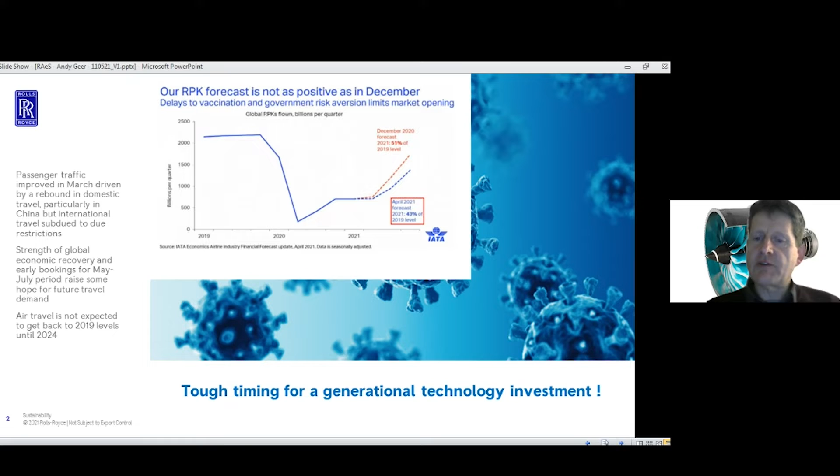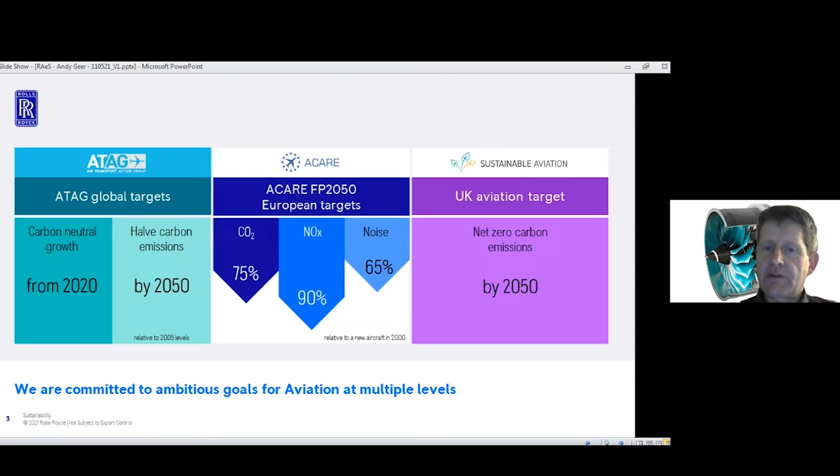On the larger and most particularly long range end of the market, classic gas turbines, but potentially modified in some way, either with an electric configuration to support them, or at the very least, combusting sustainable aviation fuel. That is, fuels that are produced in a net zero carbon, closed carbon cycle way.

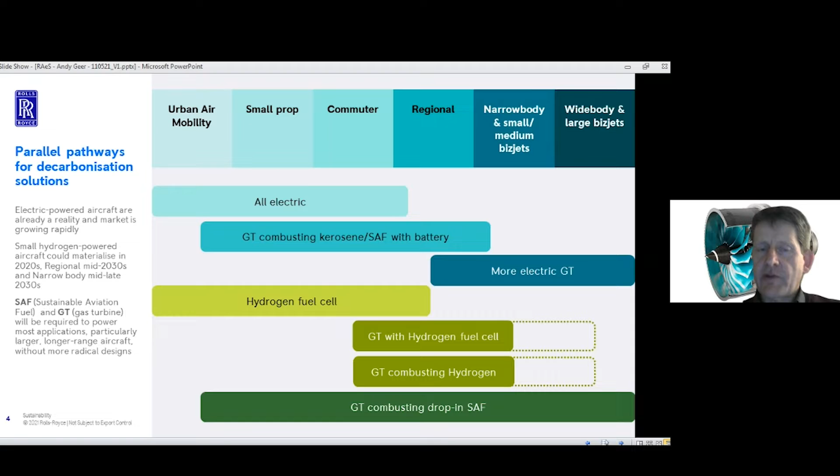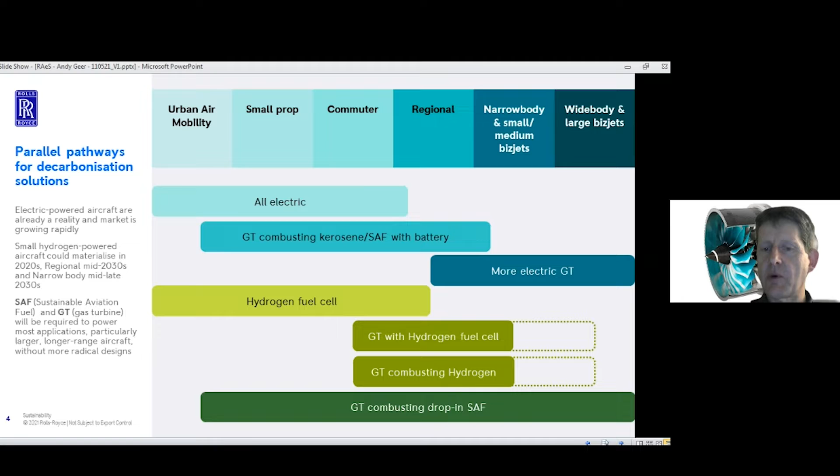It's a brave vision, and of course it's challenging to see a situation where we have to develop potentially multiple technologies to deal with fragmentation of the way aviation is constructed, from short range, small aircraft to long range, large aircraft. Rolls-Royce, of course, as a supplier of power and particularly in aviation propulsion, wants to be engaged in all these areas. And as a leader in technology, we're striving to bring technologies to market that can address as much of this sector as possible.

We have to cooperate in some ways at aircraft level, at engine level, and indeed in provision of fuel and fuel logistics. So really interesting times that we're living in, where you see these usually competing companies coming together to collaborate and move the industry to a new place.

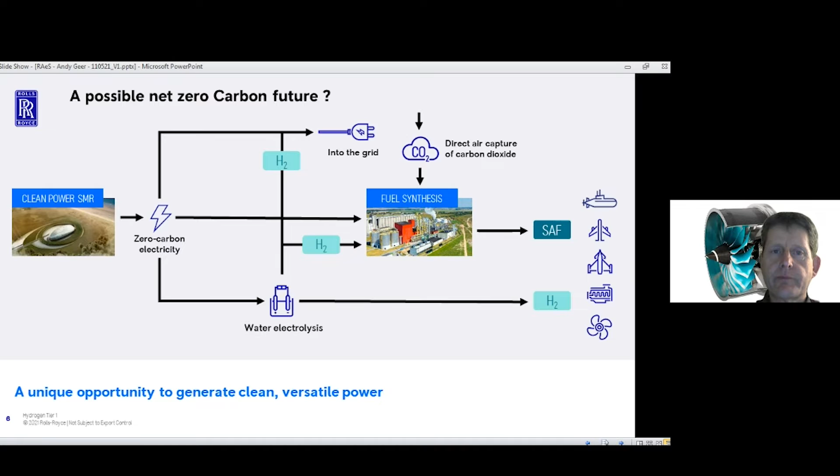Perhaps equally important, our job actually very often is to integrate other people's technology with our own to get from a propulsion system or an element of a propulsion system to a fully integrated platform solution. So 3 key areas of focus: evolving the gas turbine, developing radical alternatives, and integrating to platform level, all at the same time as motivating the wider industry to develop availability of zero carbon or net zero carbon fuel stocks.

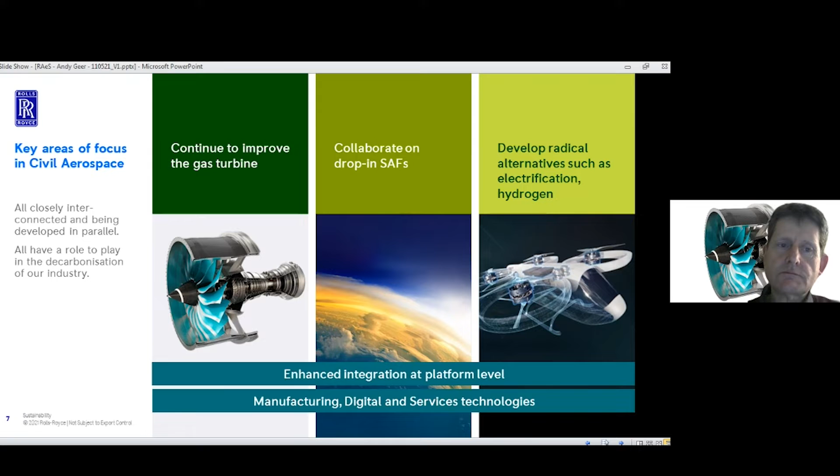So a quick aside, electrification. In Rolls-Royce's history, Rolls-Royce started out as an electrical motor machine, but it's a long time since we were engaged in that business. Nonetheless, we recognise electrification in aerospace is going to change major parts of society, major parts of industry. We're seeing that happen now. Lots of new startup companies active in electrical propulsion, active in air mobility in particular, flying taxi. But also active in providing parts of propulsion systems, parts of electrical control systems.

And as I mentioned already, you can see in society, if we're going to move to a very much more electrical set of solutions, there's going to be a whole level of infrastructure investment required to achieve that. I've no doubt you'll talk amongst yourselves about that in the automotive space. It's equally true and probably a level of challenge higher in aviation space.

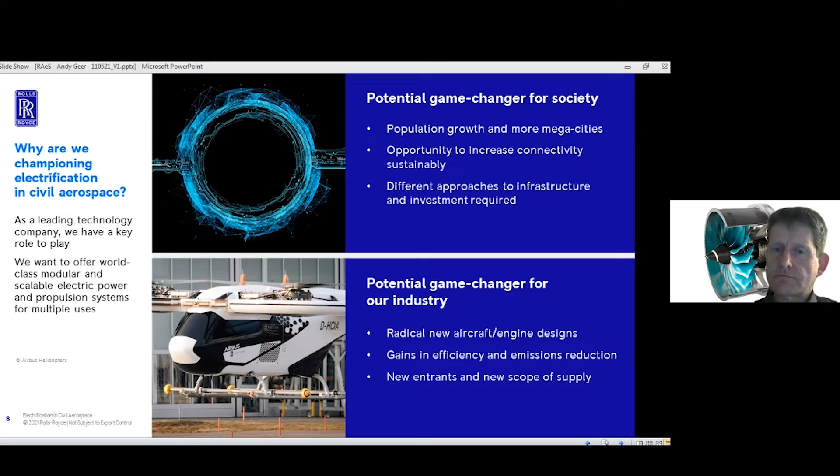There are many pictures and many ideas, so it's a very fast changing area. However, when you look at it from our perspective, it's underpinned by investment in technology, both in electrical machines and the gas turbines that might produce the raw power.

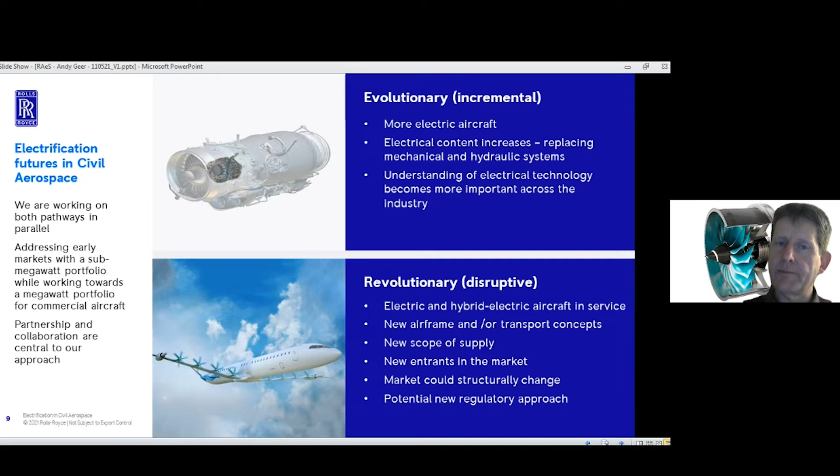A little bit different now, something you're going to see in the press before long. As interested aviation watchers, you may already be well aware, Rolls-Royce is doing some work on a project called Accel, pictured here. So a small, all-electric, single-seat aircraft designed to push the airspeed record, push the airspeed of all-electric flight, I should say. Really exciting project for the company to work on.

Now, it's a bit of a headline grabber, but why is Rolls-Royce doing this? Why is it spending money in tough times on a racing machine? Well, the answer is learning by doing. The answer is there's no better way to find out how to deliver electric propulsion than trying it. And that's what's happening through this process.

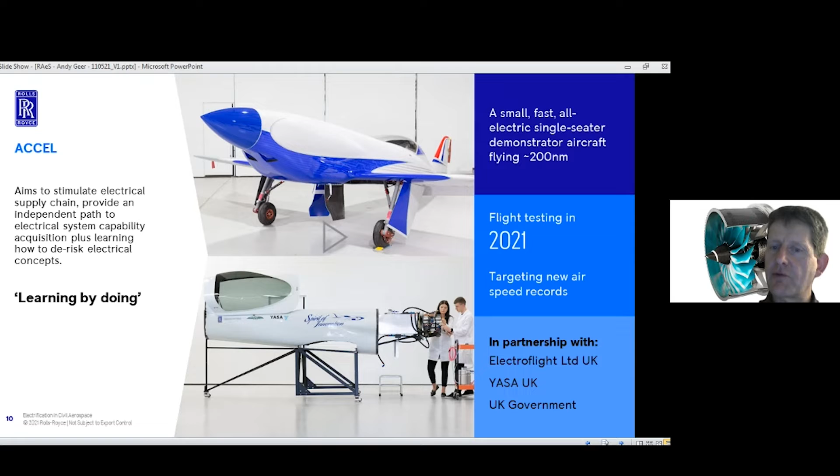So in actual fact, if I skip to the next picture, there you can see a photograph of the aeroplane outside the hangar, just about to undergo some ground runs just a few days ago. So electric propulsion in one form or another is coming. Quite what market develops behind it, we don't know. Rolls-Royce is absolutely engaged in the technology journey to be a part of that new market.

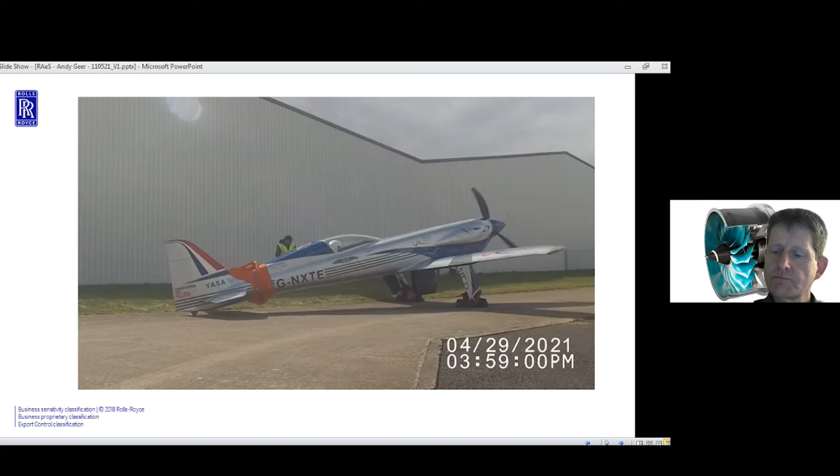Just one picture at the other end of the market sector. So that racing machine is about a 400 kilowatt animal. This is a 2.5 megawatt animal. So something that might look like a hybrid electric system, gas turbine close coupled to a megawatt class electric generator for something that could support that kind of revolutionary distributed power aviation solution.

You can see the tagline for Rolls-Royce, Pioneers of Power. This is a really interesting example of my 3 pillars picture. A highly efficient gas turbine, closely connected to a highly efficient electrical machine for use in a hybrid system.

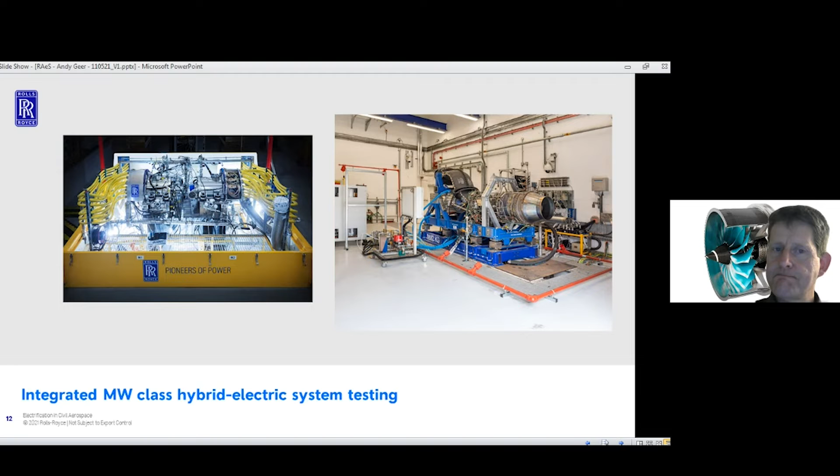The eagle-eyed will have spotted in my context chart, talk about hydrogen. A lot of discussion ongoing about hydrogen as a means to produce zero carbon aviation. And I've just summarised here a few of the factors that would attract you to using hydrogen as a fuel, perhaps. It's clean, it only produces water as an emissions product. You can derive it from a number of different sources, and of course it's an effective and fairly power dense fuel supply. So on the face of it, lots of interest in hydrogen as an alternate power supply.

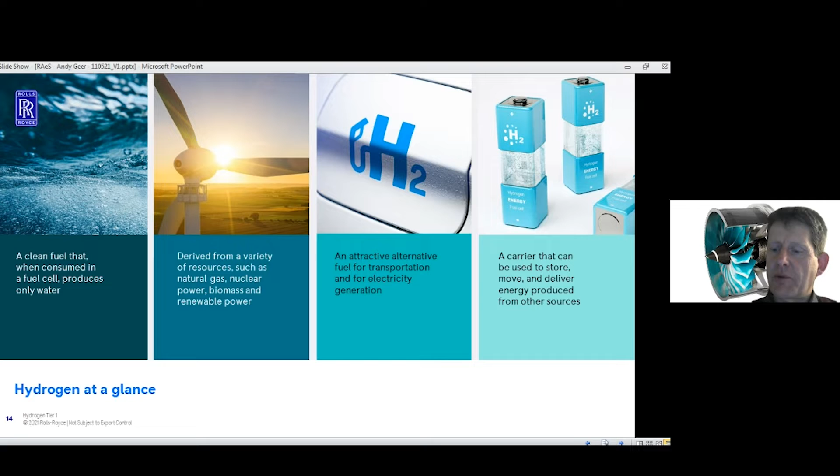But in aviation, there's some real challenges here. Burning the fuel is probably relatively low down the list of challenges compared to some of the other things that we need to understand and deal with if we're going to move into this kind of space. So 4 aspects of flying hydrogen which need to be grappled with. A lot of discussion about contrails and whether contrails contribute significantly to environmental damage or not. So hydrogen is a clean fuel, but it produces more water vapour. So water vapour at altitude would mean contrails, and we need to understand what that means.

Plus, of course, as you can see from the other pictures, there are some quite considerable logistic challenges associated with the use of hydrogen as an aviation fuel. Power density to volume, storage requirements, temperature requirements. So I really put that on the table to show that there are other challenges around us right now to deal with.

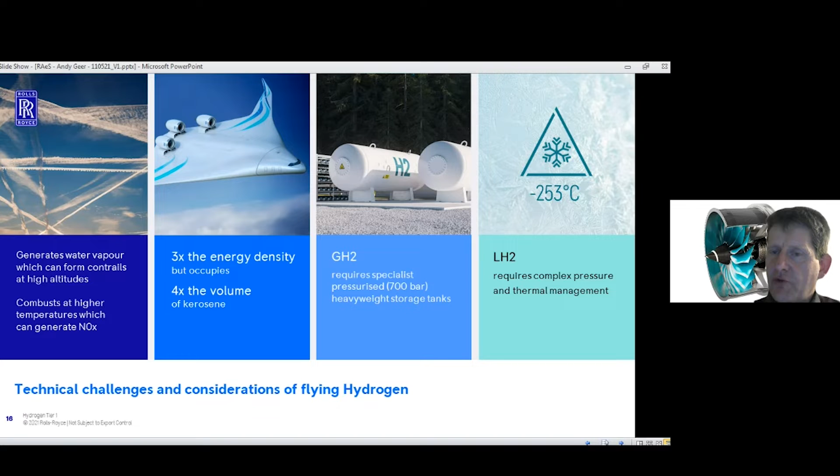How might those come together? And if I emphasise again Rolls-Royce's ability to integrate, here's a situation where we might see hydrogen being integrated with world-class gas turbine technology to produce one of a number of aviation architectures. Fuel cell to power, direct, no gas turbine involved, or more likely, hybrid systems where a gas turbine combusts hydrogen or acts in a boost mode, combusting hydrogen alongside fuel cell technology.

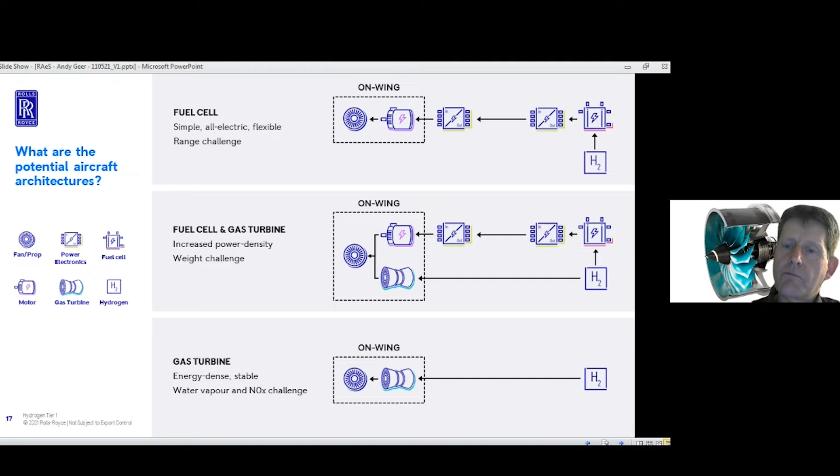Now that's quite a bit of context behind why Rolls-Royce is working on 3 pillars of technology investment: electrification, hydrogen power, gas turbines. I'm a gas turbine guy, right? My job is to deliver a gas turbine. And I'm pleased to say, in a narrow context, a great many of the solutions I've just shown you in context still rely fundamentally on a gas turbine producing raw power, even if that power is consumed in a slightly different way, into a hybrid cycle or a more electric cycle.

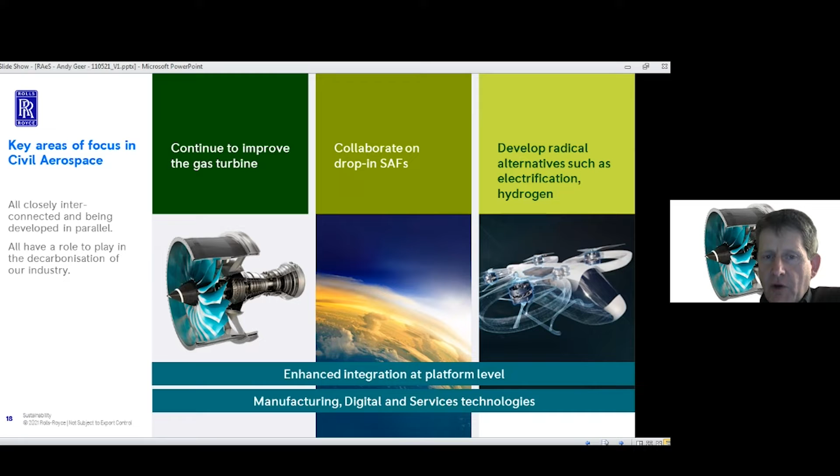So the challenge ahead of me and my team is very clear. It's to produce an UltraFan, a vision and a technically integrated solution of the next generation of gas turbines. What they burn, how they burn it, and how they provide the power, we can be flexible on that, but you fundamentally need a good, capable gas turbine to start the race. So without more ado, let me talk about what the UltraFan is as that next generation gas turbine.

Here's an artist's impression, or a general arrangement, if you like, a picture of an UltraFan. And badged on it are some of the technologies that have to come together in order to make an UltraFan engine work and to be super efficient. You can read the words for yourselves, but I'll highlight some of them. Those in green boxes, that is a low-speed carbon titanium fan system, power gearbox, an Advance3 or revised work split core, and a high-speed multi-stage IP turbine system.

Those 4 pieces of technology become absolutely essential to produce an UltraFan. Take away any one of those and you don't have an UltraFan machine. So those 4 pieces of technology are the prime delivery from the UltraFan Demonstrator program, making sure we can bring all those things together, integrate them, and have a super efficient engine as a result.

Things in grey then are either enabling technologies, so they're things we would like to do alongside those essentials, or they're things that bring a better attribute to the engine. So for example, if I could focus there on hybrid ceramic bearings, that's a modern technology bearing using ceramic rolling elements that allows us to have a smaller bearing for a given load configuration than a traditional metallic bearing. It's not essential for an UltraFan, but it's highly desirable because it allows us to improve the engine's attributes.

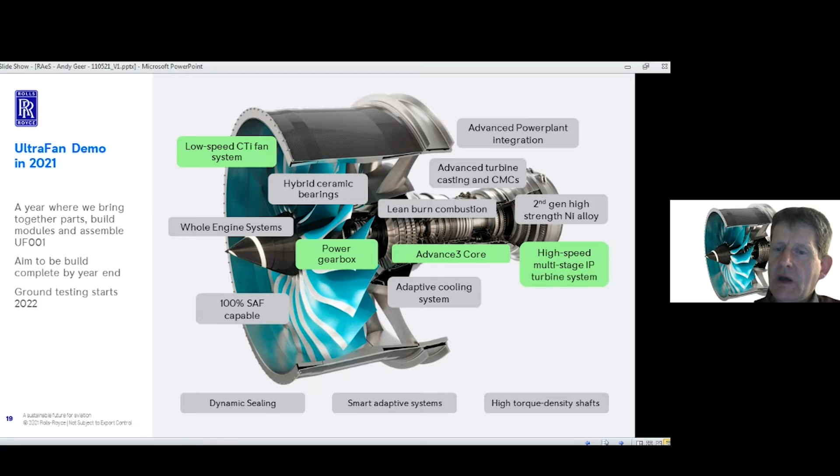A quick step back. If you're familiar with jet engines and aviation, I'm probably teaching grandma to suck eggs here, but why are we driving an UltraFan and why does it look the shape it does? Fundamentally, it comes down to what produces the most efficient power in a civil aviation, civil aerospace context. And that's two things shown here in orange and blue.

So in orange, the first thing you need in a highly efficient engine is a very efficient and power dense core, a gas generator. So the part of the engine that receives the fuel, pressurizes the air and produces power available to drive the fan system. So a very thermally efficient, power dense core becomes an essential for UltraFan, and a lot of the technologies we're working on drive that. Smaller core, higher overall pressure ratio, more efficient.

That gets matched then to the section in blue, a larger fan for an overall increase in bypass ratio, a larger fan running slower in order to move a higher mass of air at lower speed, which gives you a propulsive efficiency advantage. So as technology allows it, and you'll know this from the historical trends in the business, engines have moved to higher overall pressure ratios in the core, driving bigger bypass ratios, slower fans, bigger fans, as being the most efficient way to produce civil thrust.

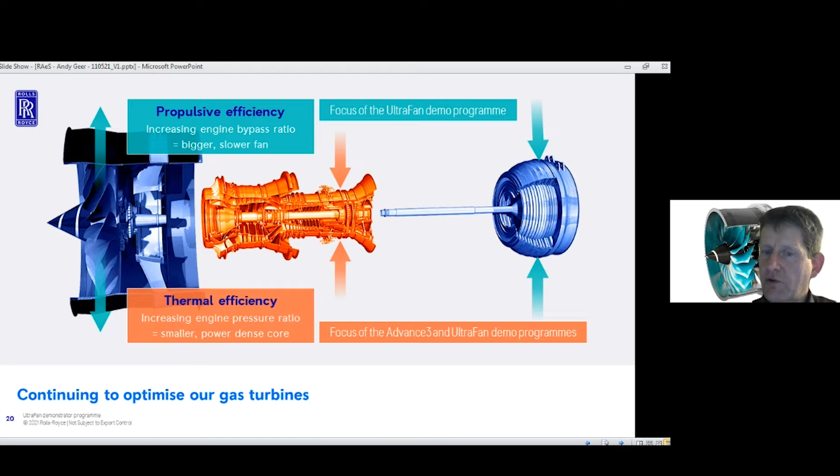So it's that fundamental physics, if you like, which is driving the overall configuration of UltraFan and leads to the inclusion of the technologies that I showed you on the previous slide. A low-speed carbon titanium fan system, a power gearbox, a power-dense, energy-efficient core, and a high-speed multi-stage turbine to drive the fan.

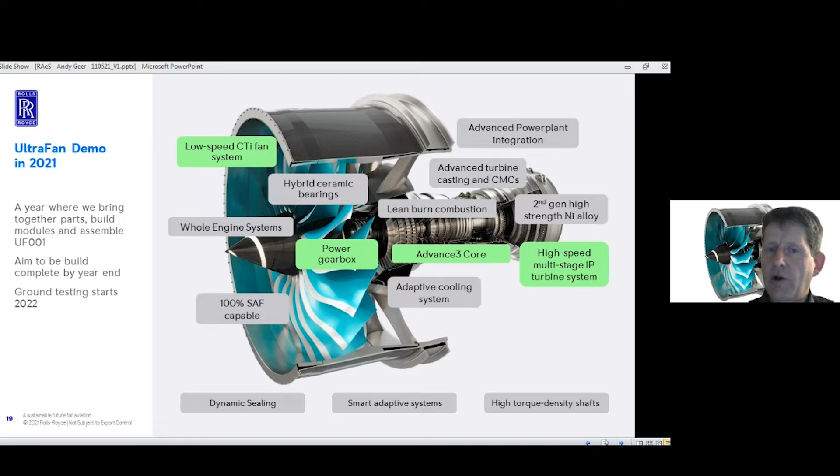Now, when we put this program of work together for the UltraFan, which was quite a while ago now within Rolls-Royce, it was kicked off in 2013, 2014. We laid out a program of work which is represented by this cartoon. The upper part of the diagram on the right schematically shows you the shape of the program. So if you're eagle-eyed, you'll notice there that we have the essential technologies: power gearbox, fan, high-speed IP turbine, and what I've called here whole engine. Those four essential technologies coming together and iterating over time as we move through an engine development program that comprises 3 ground test vehicles and a single flight test vehicle.

So that program of work provides a means for us to bring together, explore, improve and productionize, or come close to productionizing, the technologies that are necessary for an UltraFan to be successful, culminating ultimately in flying testbed experimental flight test operation to prove that the engine operates successfully at altitude.

The lower half of the diagram is slightly different. It shows you here a risk waterfall. So the vertical axis here is technologically driven risk. So when we bring together all the new technologies that feature in UltraFan, inevitably we're representing quite a lot of engineering risk there, the power of discovery.

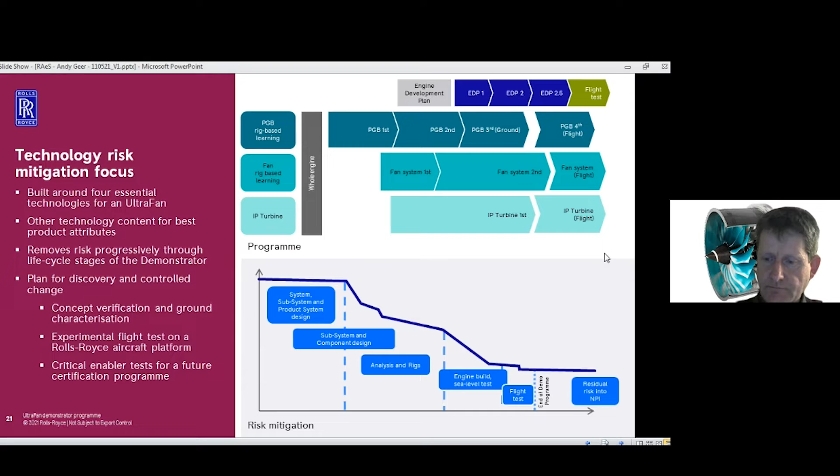So where are we today? The essential technologies, the 4 essentials for the UltraFan program, I'm pleased to say, have met the necessary standard for our first demonstration engine to run in the EDP, or Engine Development Program. That's rather unimaginatively titled UF001, UltraFan number 1. And I've summarised here the work that's gone in already.

Before we get to this place in 2021, Advance3 was a precursor engine, actually built around an XWB and a Trent 1000 component set with a new core, new power dense core inserted in the middle. That Advance3 UltraFan core technology completed 130 hours running, mapping out the basic performance and thermal capability of all of the hot section, the power dense core for UltraFan. Very successful program. You can see a photograph there of the engine installed in the test cell.

Collected a ton of data from that engine. It has about 3,000 lines of instrumentation in it. And we captured, I think it's approaching 3 terabytes of data from that engine, which we need to analyse and understand to make sure we can optimise those technologies into the UltraFan and into a future product. Fundamentally, though, it comes down to some very simple summaries. That engine proved the basic cycle capability of the core, and it met the thermal efficiency expectation. In other words, the fuel burn performance.

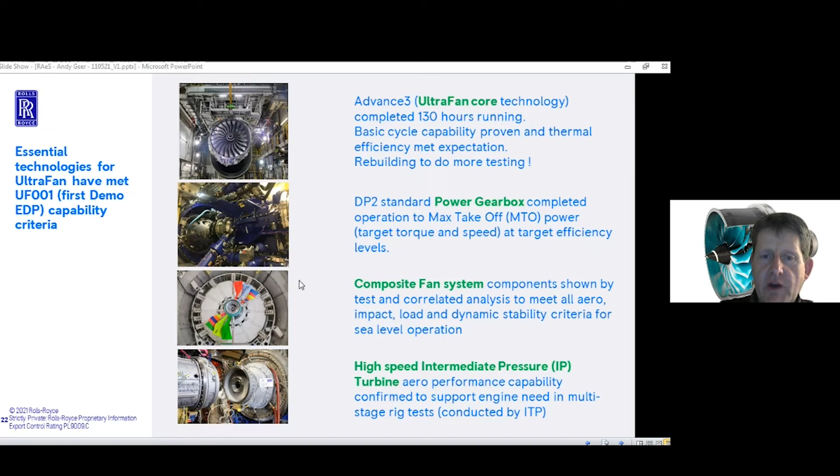That unit produced max takeoff power, that is target torque and speed, at its target efficiency levels. That's a massive achievement for us and a big piece of technology de-risking. If I put that into context, I'm hoping a little pop-up will appear. There we are. If I put that into context, here are some of the statistics that go with that power gearbox.

DP20501 is the actual test unit, shown here in the rig. Max takeoff torque, 82 kilonewton meters. Max takeoff speed, 6,000 RPM. 64 megawatts of transformed power. And it does all that in about a 1 cubic meter space of gearbox.

So to put it in other words, that's 500 family saloon car power transmissions squeezed into a 1 cubic meter space. An incredible thing to see, and I think a measure of the power density that you have to deal with if you're going to make an engine of this efficiency level to this kind of power capability.

Third essential technology, composite titanium fan system. Picture here actually of a slightly subscale unit on test. This is undergoing or about to undergo what we call a trailing blade impact test. So that's where we explosively release a blade and look at how the engine system controls that release. That's a look ahead to a certification requirement that all such fan blades have to meet.

A huge amount of work has been done on the UltraFan to bring that composite fan system to readiness, and I'm pleased to say we now have a design that meets all of the aerodynamic, impact, load and stability criteria that it needs to support the sea level operation of the UltraFan. That's an investment of about 10 years of effort to get to that place on a composite blade, so a major undertaking in its own right before the UltraFan program really gets started.

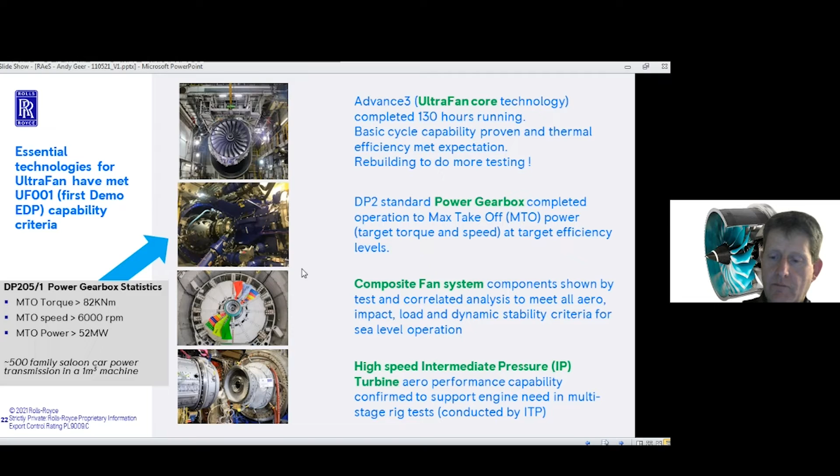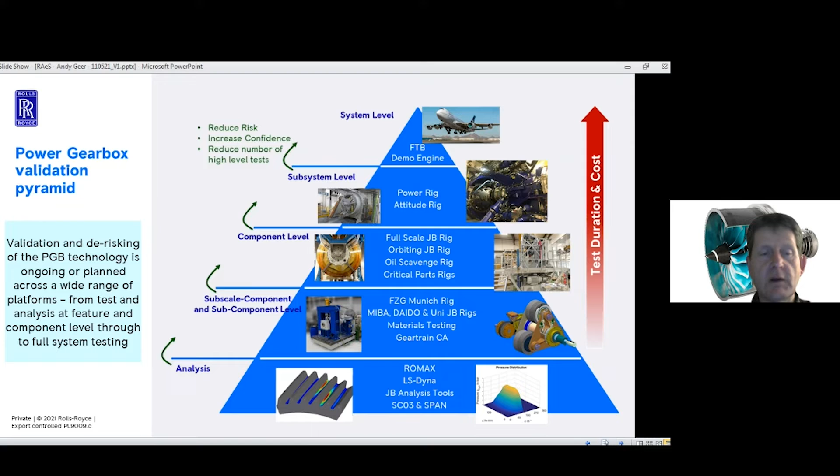I included those pictures because it's worth remembering that whilst we're developing technology for a jet engine in the shape of the UltraFan, we are also developing novel supply chains and manufacturing processes on the way, because they're necessary to produce component parts to the standard we wish.

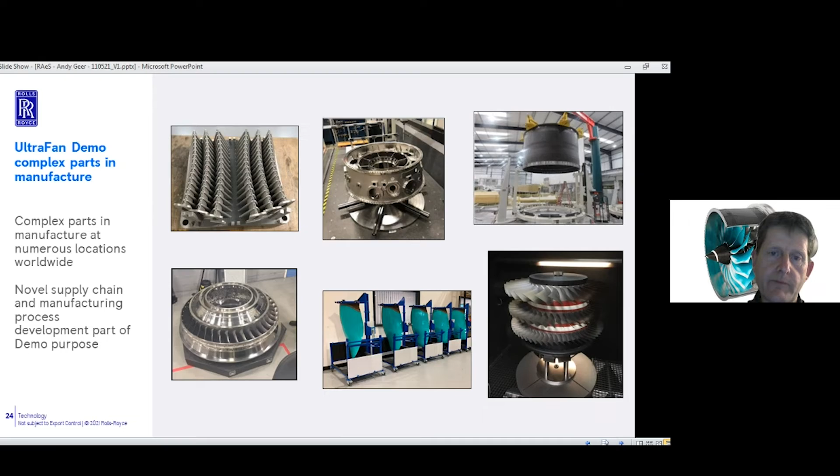Engine 1, UltraFan 1, is being built in a facility we're calling Demo Works in Derby. We've taken one of our older facilities in Derby that used to be used for experimental build and reconfigured it to be concentrated around UltraFan build. Component parts will enter that facility and the full engine will leave. All elements of that engine build will be done in the same place by a small team working hard to familiarise itself with what is quite a different engine configuration for us.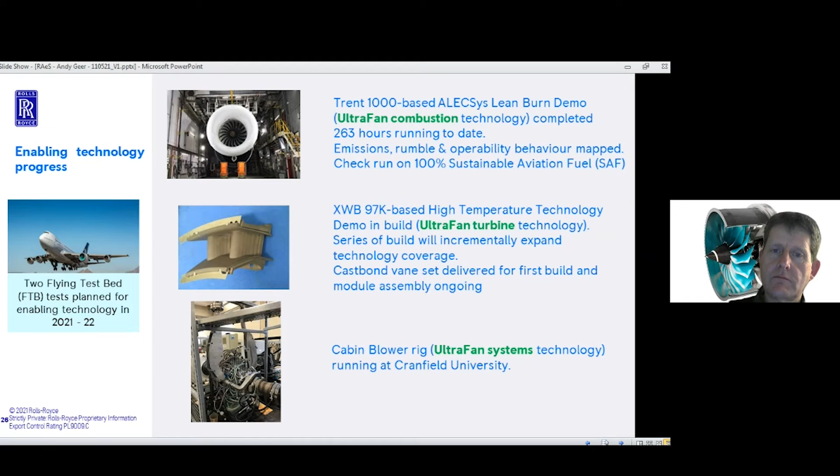So there you go, that's a quick whiz through where the UltraFan technologies lie today. As I said at the beginning, the context in which we're delivering this project has changed quite markedly over the last 18 months with the impact of COVID. To be honest, it's felt a lot more difficult to deliver now because of the challenges of COVID, not just disrupting Rolls-Royce, but disrupting the whole of the aviation supply chain. But we're making really big progress.

You can see from the images I've just shown you, we've got the component or the individual essential technologies ready to go into an engine. We've got the engine component parts being delivered into the assembly facility, and we've started assembly on the first modules. Perhaps equally importantly, some of the enabling infrastructure is either in place or on the way to allow us to test this big brute of an engine.

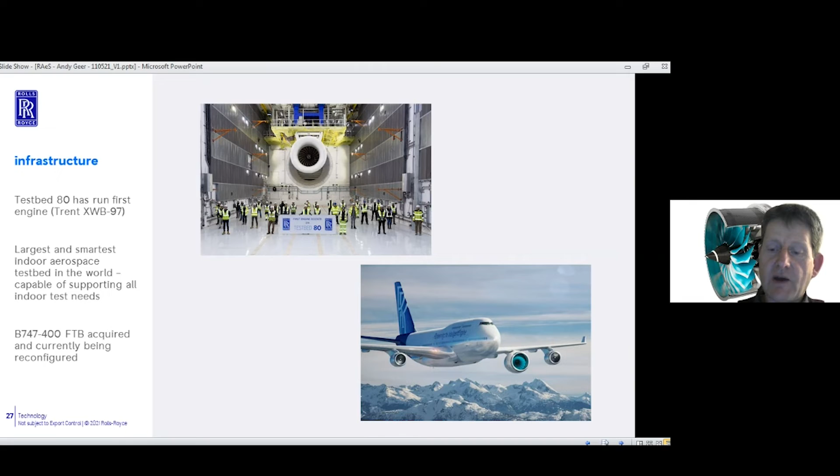So really exciting set of infrastructures, really exciting time now where this engine comes together by the end of the year, testing next year, really to put proof to all of our claims as to how good the UltraFan might be.

This is an artist's impression. I hope before very much longer I'll just replace this with a photograph, and it'll be all the more impressive for being real in metal and plastic as the next generation of engine that we're ready to bring to market.

So why do we do this? Why is Rolls-Royce doing this? We need to do this. I think it's self-evident from what I said before. Gas turbines are here for a bit longer. Even if we start to see electrical machinery and hydrogen-powered machinery coming into the aviation marketplace, many of those systems will have at their heart a super efficient gas turbine. Certainly at the long-range large aircraft end of the spectrum, a gas turbine is it. And a super efficient gas turbine, which is leading in terms of not only fuel burn, but its emissions conditions and its noise signature, will be even more vital as the world comes back out of the depression of the aviation business than it's been in the past. So, UltraFan, it's clear in my mind, it's a major step in producing the next generation step towards a sustainable aviation platform. And it's clear in my mind, UltraFan Engine 1, Build 1, by the end of this year, early into next year, has to measure up to all our ambition and show that it's capable of these kind of world-leading attributes.